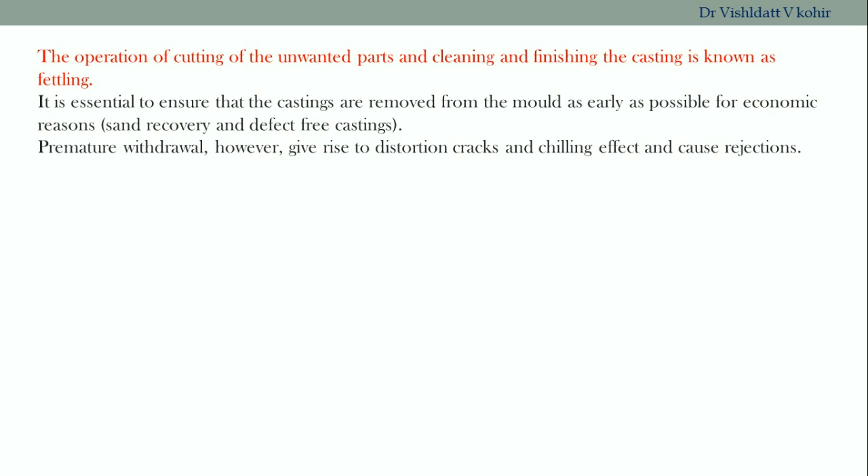It is essential to ensure that castings are removed from the mold as early as possible for economic reasons, that is recovery of the sand, and to have defect-free castings. Even premature withdrawal is not recommended because it leads to distortion of the walls, cracking and chilling effect, which leads to the rejection of the castings. Therefore, the temperature at which the fettling operation takes place is very important in foundry.

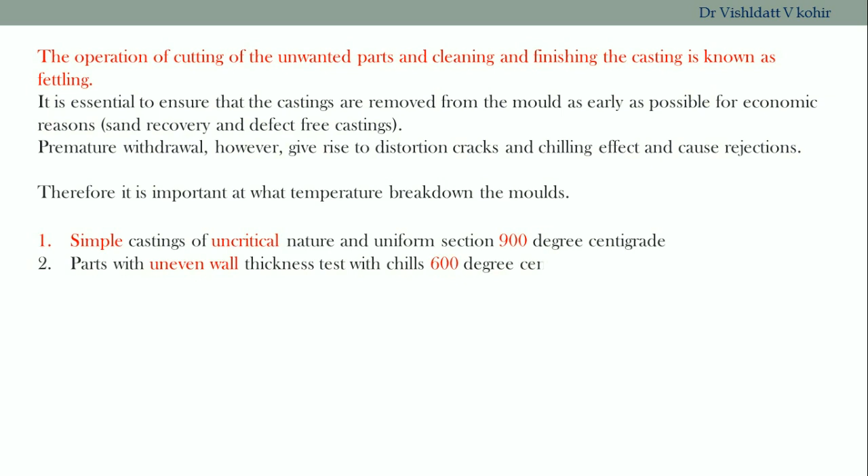For simple and uncritical jobs, 900 degrees centigrade is recommended. If the parts have uneven walls, then it should be carried out at 600 degrees centigrade. If the casting has very critical shapes and is prone to warping or cold cracking, then it should be fettled at 300 degrees centigrade. Thin walled castings are fettled at 100 degrees centigrade.

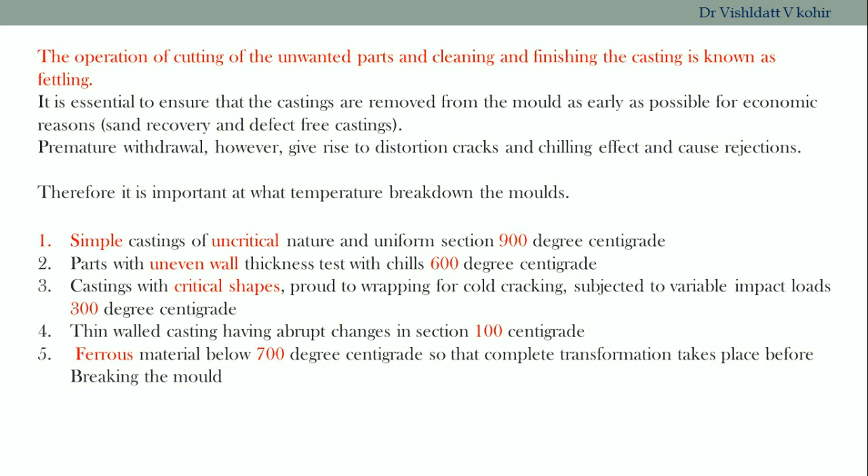Ferrous metals are also fettled below 700 degrees centigrade so that the transformation from austenite to the different phases at room temperature takes place completely. If we carry out the fettling of ferrous materials above 700 degrees centigrade, the transformation will be incomplete. This leads to defective casting.

The different stages of fettling are: number 1 is knocking out of dry sand cores, and normally this is done by rapping or knocking the mold with an iron rod. For quick knocking, pneumatic or hydraulic drives are used. These devices, besides knocking the cores, also help in cleaning the castings.

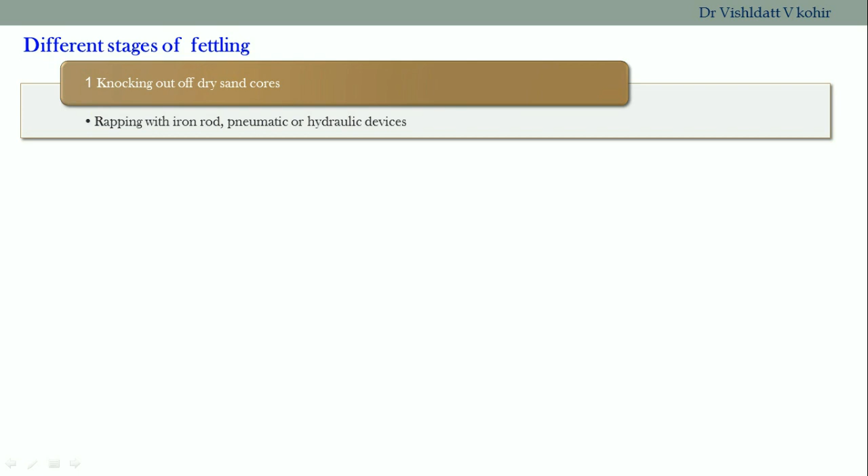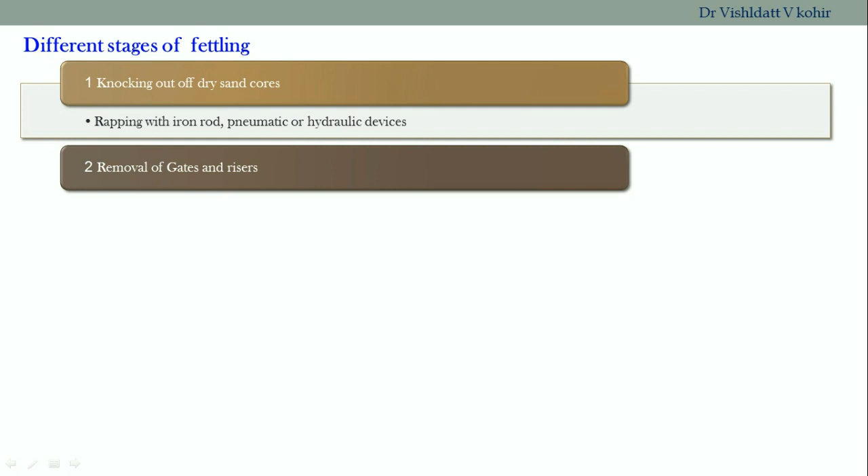Second one is removal of gates and risers. The choice of method for removing gates and risers from the casting depends upon the size and shape of the casting and the type of the metal. Some of the ways of removal of gates and risers are knocking off or breaking with a hammer, which is particularly suited in case of grey iron castings, or sawing with a metal cutting saw, which may be a band saw or a circular saw or a power hacksaw.

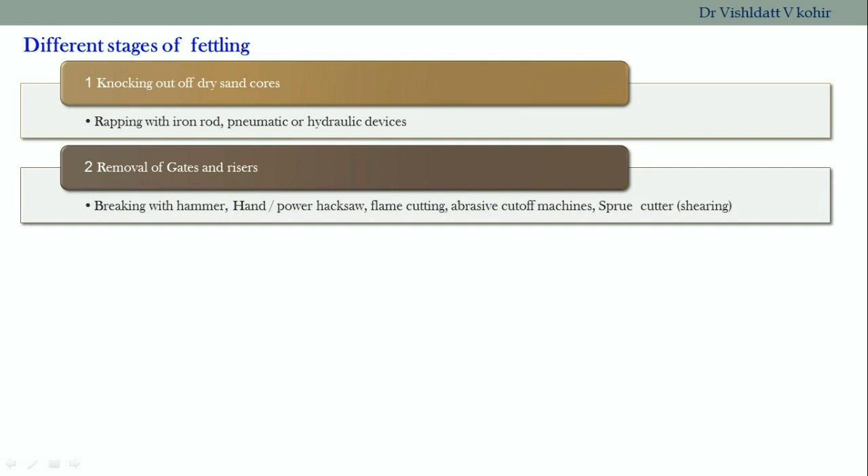The third way is to use the flame cutting method using oxyacetylene gas. Sometimes we use shear cutting machines for removing the sprue from the castings. Even we can employ abrasive cut-off machines for removing gates and risers.

The third one is extraction of fins and unwanted projections at the places where the gates and risers have been removed and also elsewhere. For this, we will be using grinders. It may be a table grinder or a pedestal grinder. We may be using chipping with hand or pneumatic tools, or flame cutting, or removing metal by arc air equipment, or using the filing operation.

Next is cleaning and smoothing castings. Here we are going to use equipment called tumbling equipment, sand blasting and shot blasting. In case of tumbling, we put all the castings into a barrel and it is rotated at a speed of 25 to 50 rpm. When the barrel is rotated, it causes the castings to tumble over and over again, rubbing against each other. Thus, by continuous spinning action, not only do the castings get cleaned and polished, but also the sharp edges and fins get eliminated.

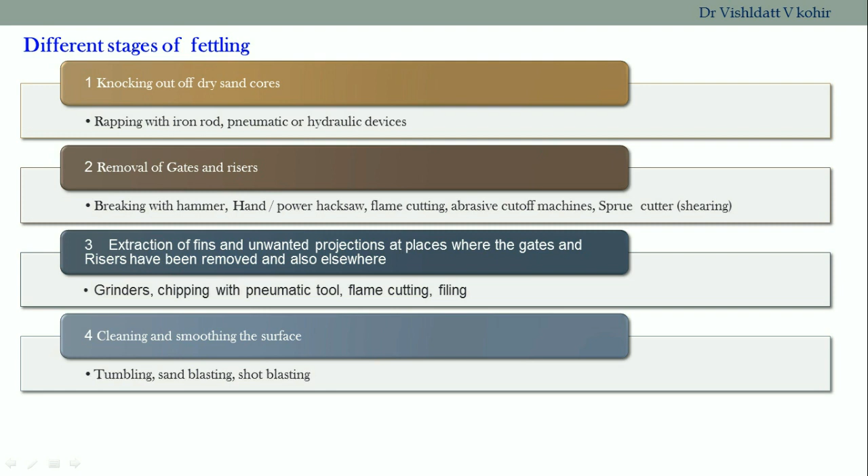In case of sandblasting, we use a high velocity stream of compressed air along with abrasive particles. It is directed on the castings. This removes the sand which is stuck to the casting during the solidification process. Another method is shot blasting. In this case, instead of using air pressure for hurling the abrasive grit towards the casting, centrifugal force may be exerted by means of an impeller wheel. The abrasive applied in this case is steel shot. In this way, you can carry out the cleaning and smoothing of the castings.